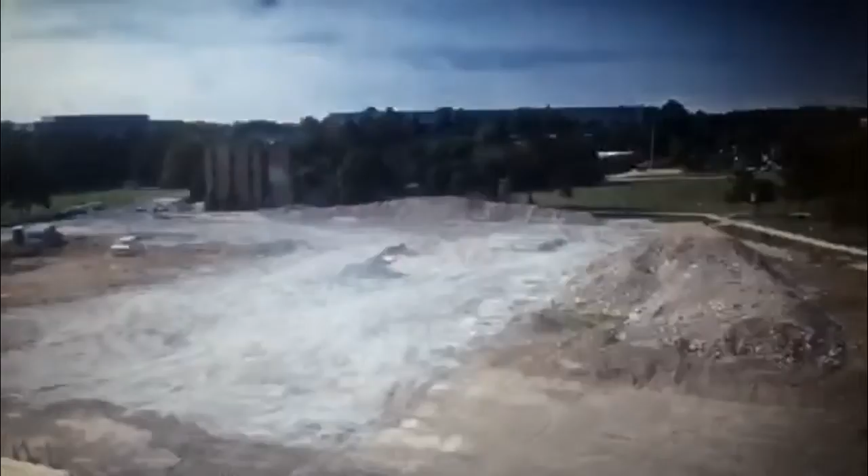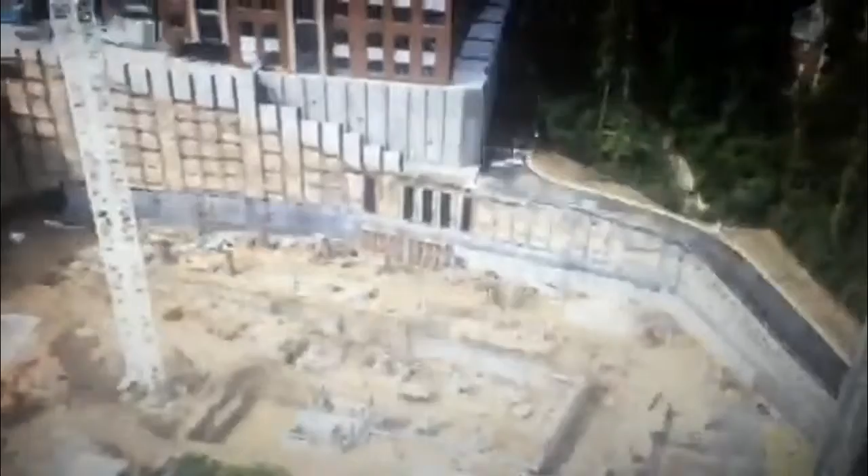Hello, this is Dr. David Joyner. We're getting ready to give you a presentation, an example of dynamic engineering. We use a product called SiteOps in order to do this dynamic engineering. It is a very powerful and quick way to produce conceptual plans that used to take two to three weeks to do, and we can now do in just two or three days. It is amazing, and I think you'll agree with me as we go through it.

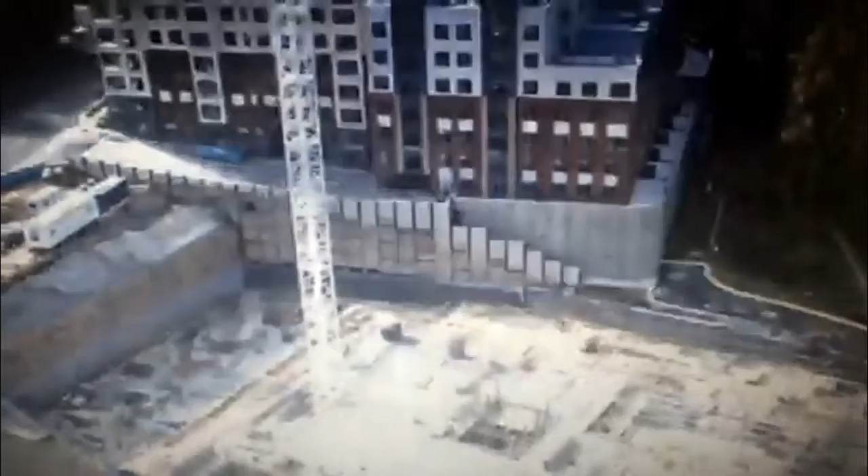I want to remind everyone who's getting ready to watch, this gentleman doing the presentation is a first-rate expert, and he will fly through in nine minutes what everybody else would take twice as long to talk about. He is just that good with it.

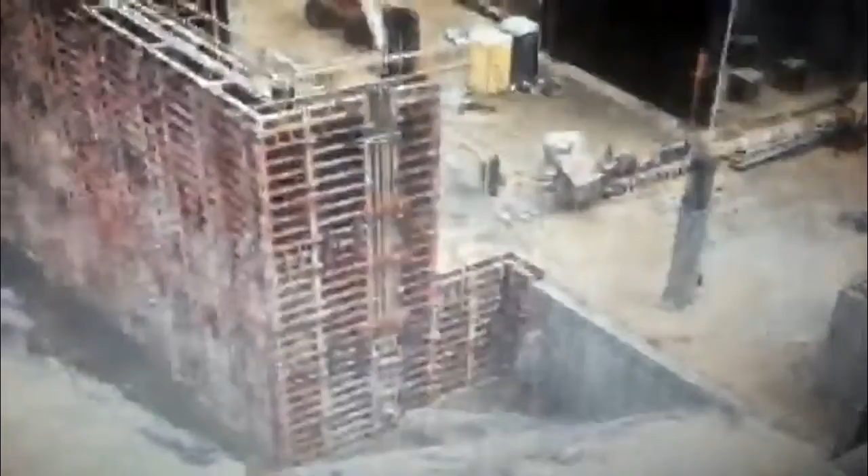Dynamic engineering is going to very quickly allow us to look at all the what-ifs on your job site and decide the best place for the building, the best size of the building, how to put the parking in, where to put the inlets for water, how to do the grading. I mean, it will not do preliminary engineering, but it will almost get us there. It is that good. I'm very impressed with it. I think you will be too.

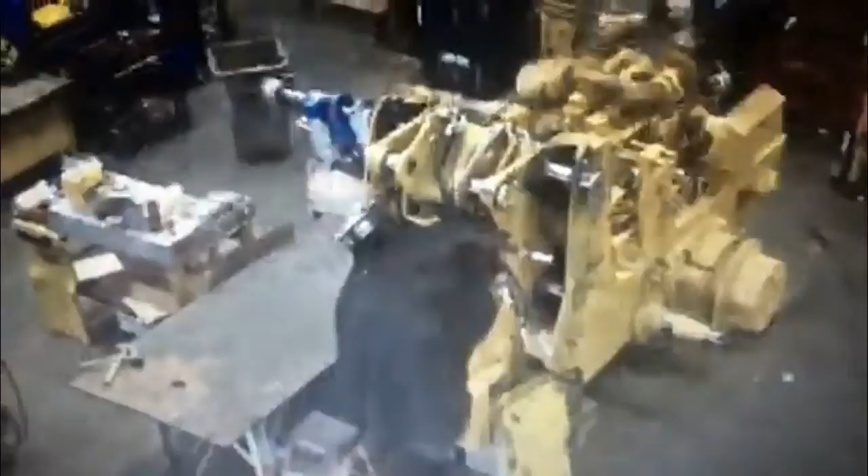In addition to dynamic engineering, the one thing that Trinity Group can do that other engineers and architects cannot do is go that next step beyond what SiteOps can do, and take that SiteOps information and pull it into a financial pro forma. Now, without any further ado, let's begin.

You can start with something as simple as nothing and just start drawing boundaries and buildings, or you can come in and maybe use one of our tools that allow you to go out to the internet and grab some data. So we're going to quickly add in an address, but by all means, if you had a DWG file, say an AutoSurvey, you could bring that data in as well and start from that point, or just enter in a project and have the software just do grading and piping.

So we're going to enter in an address in Concord, North Carolina. We'll zoom into this project and we'll be able to see it, be able to grab the data. We won't use low resolution imagery - we want topography, and we'll select the data that we want to use. Now, there we go. We now have an aerial image and some existing topography to start working with our project.

So let's turn off the layer and get in and start actually performing a layout. We need to define the boundary, so we'll quickly use a tool called 'other area' to define this boundary, and there we go. We've now set this boundary for the project.

Now let's come in. Parametric design is the basis of SiteOps. Everything in here has properties. For example, I'm on a property line, and I just went and changed the setbacks to 0.

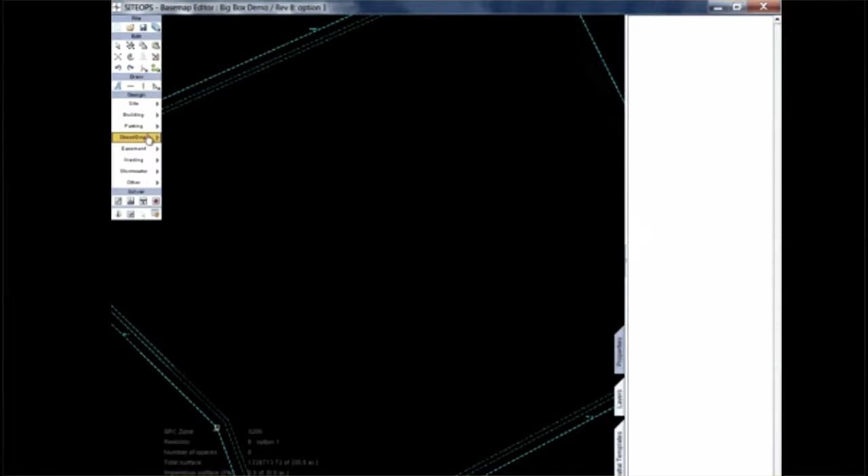Let's zoom the image down a little bit, and I'll show you examples of what parametric design is and how these objects interact with each other. So let's quickly draw a parking lot. Within seconds we can draw hundreds of parking spaces that normally would take hours to do. There we go, there's a parking lot.

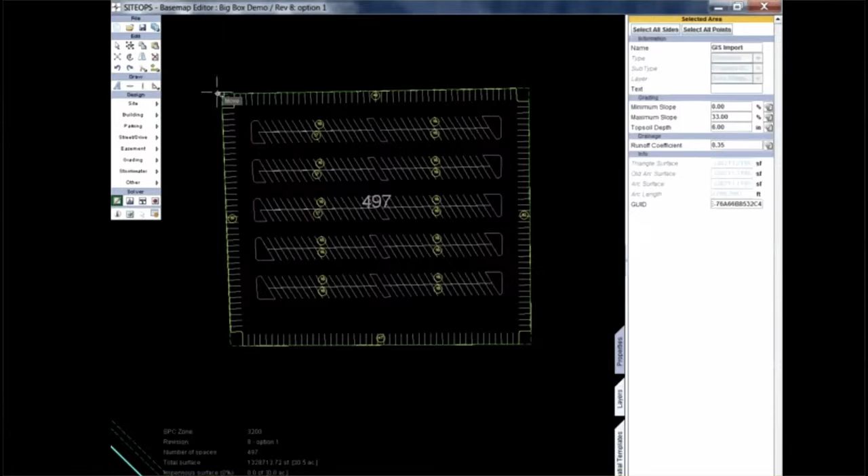Now I can look at the properties on the right-hand side. Let's say I wanted to change the angle of the parking spaces to 60 degrees. This is not a static parking lot design - it's very dynamic. Pick on any corner, move things around, change radiuses. Very interactive site plan.

So let's come in and put a simple building, maybe 100 by 200, and see how that reacts. Instantly the parking moves away. And if you notice on the right-hand side, the properties for the building are completely different than they are for the parking lot.

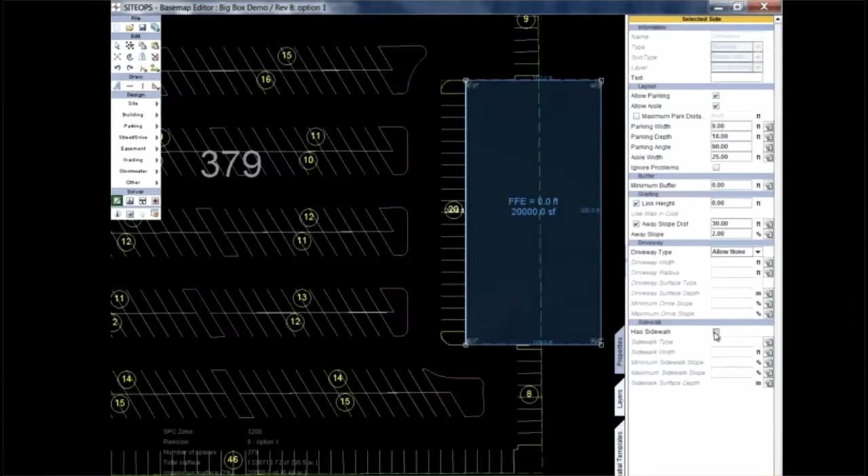Let's say we want a sidewalk. Let's make it a little wider so we can put in some tables for a restaurant. Then the client asks for something simple - let's rotate it and move it along the southern property line.

SiteOps is here to help you look at all your conceptual designs really easily and quickly, but still give the client everything they need. Now this is just a quick glance into parametric design.

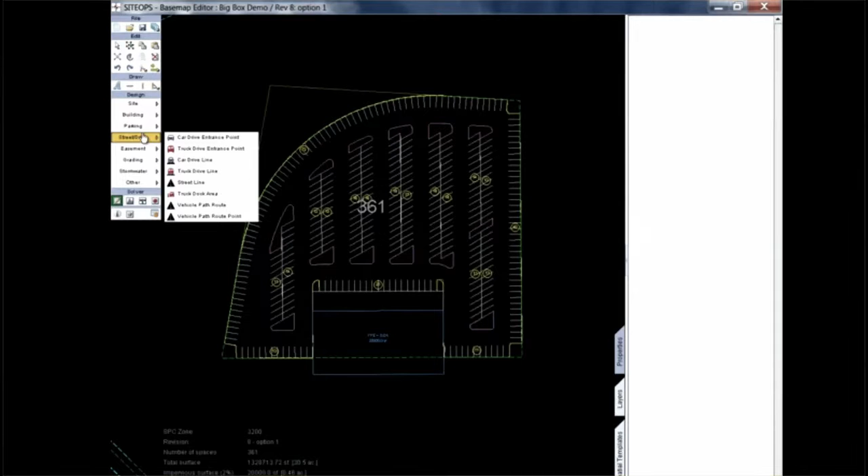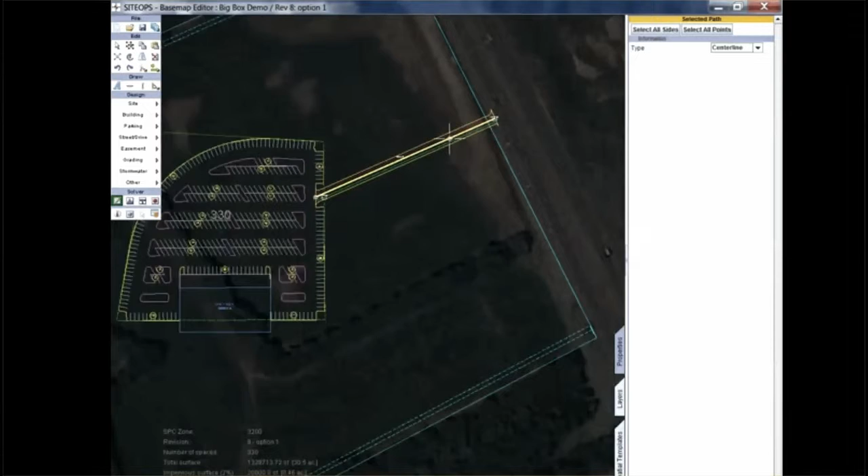So let's add a quick driveway. Simple - just pick on the parking lot where I want to tie in, go out to the existing roadway. There, we're done. So again, parametric design is the ability to allow objects to look and react with each other.

So let's come in and do this site for real. Now, spatial templates is another way a lot of our users like to use SiteOps. I could come in and set spatial templates up that can be very simple or very complex. This one has building, sidewalk, and parking areas.

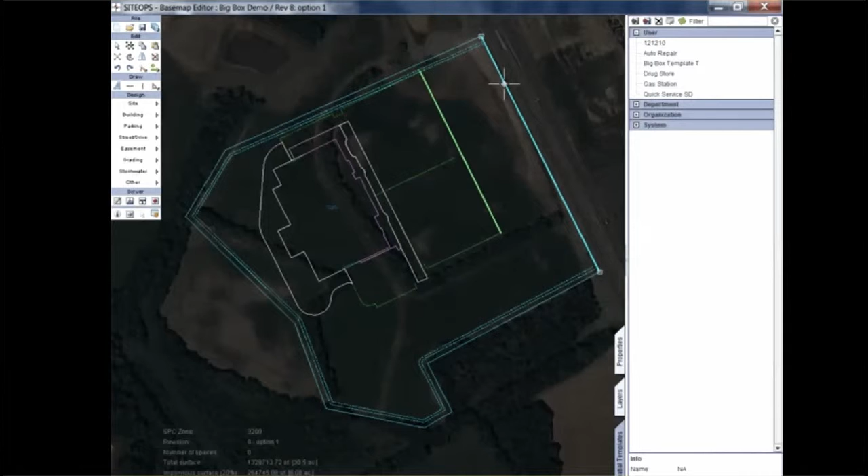You'll see I'm going to use some of our basic CAD tools, for example offset. We can have offset, alignment, snaps, different things to help control the site. We'll offset that 270 feet so it lines up. Start that drawing solver, and there we go. Now I can simply see the layout.

But with the spatial templates, it's just a starting point - you don't have to keep things a certain way. Let's do something a little extreme here. Take this parking direction line, which controls how the parking looks, and see how I simply just picked on a point, moved it, and changed it.

Let's add some parking features - let's add a parking bay point. Just simply click on it, change the property, and there we go.

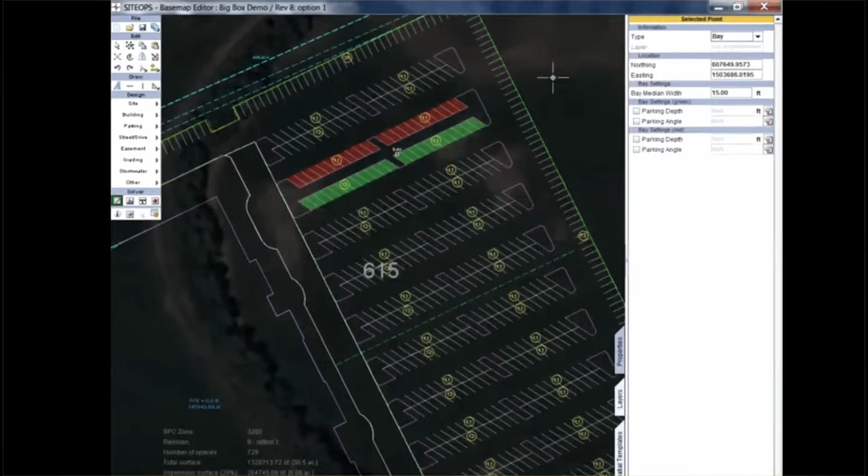Now we've got landscaping, bioswale, any kind of thing we'd want to add in there. Let's add something as simple as handicap. Come in, pick handicap, define the area where we want it, tell it how many we want to see. There we go. And then I can even change the material for that, and come in and change the slopes to reflect ADA codes that need to be met for that certain area.

So again, a lot of things inside SiteOps to help you get very detailed with your layout.

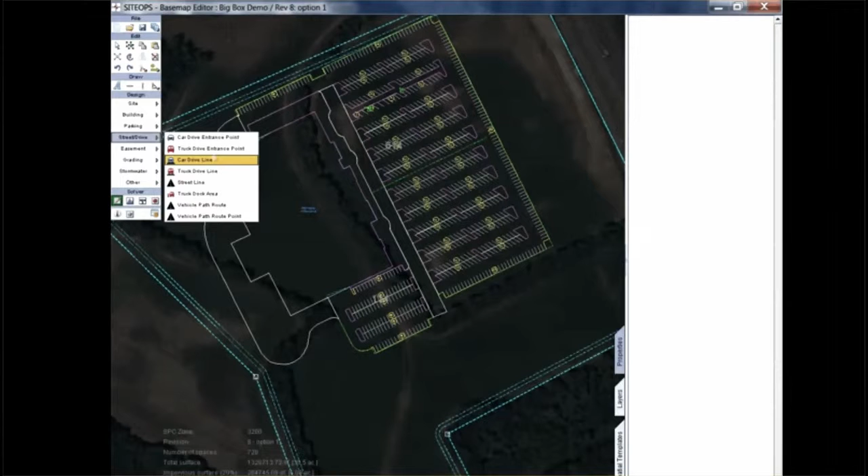So let's come in and just add a simple driveway to this one. Driveways can be very simple, just from one point to another. They can connect parking lots, connect existing roadways to proposed roadways, and we can get very detailed. Here I'm making multiple lanes in and out with tapers.

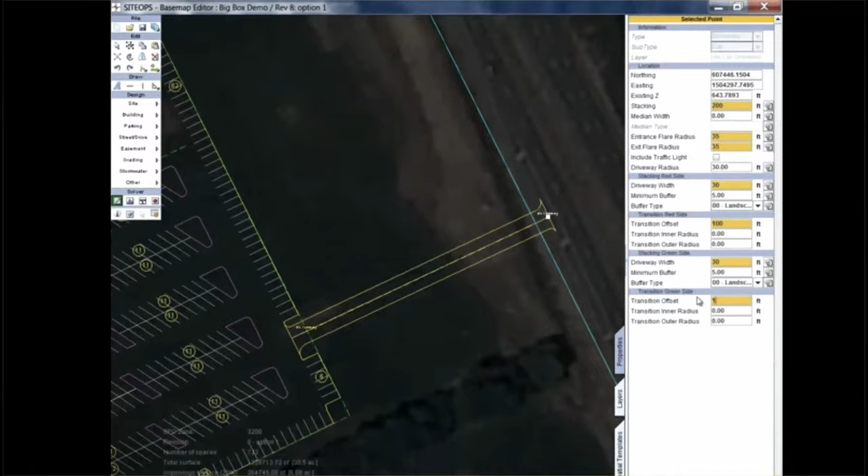You see on the right-hand side we've got the properties. Hit enter, and there it is - instantly we see that. We could add medians.

Again, a lot of things we can use. Now I've gone further along inside this design. I've added a few other spatial templates, but I want to show you one more. We'll add in a gas station.

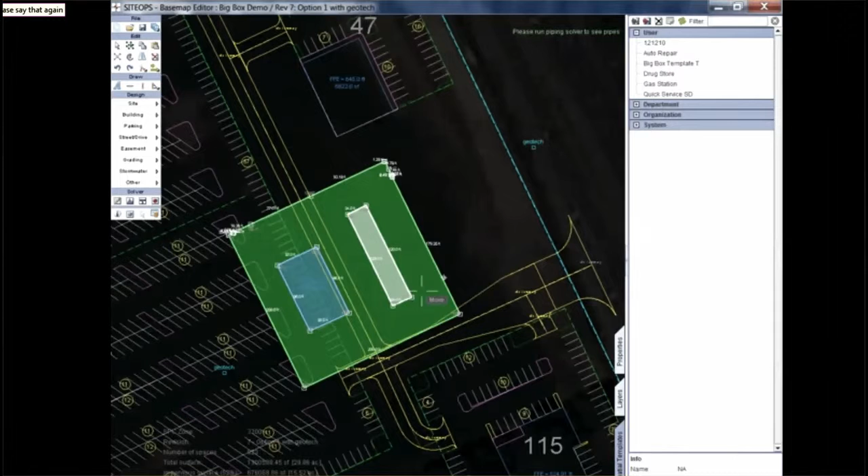Just remember, use the spatial templates. They're going to make life nice and simple for you. Bring this gas station up. All I got to do now is come in, do a quick offset. Maybe I want to align this up to a property line. Drop a few driveways, hit the solver button, and I'm done.

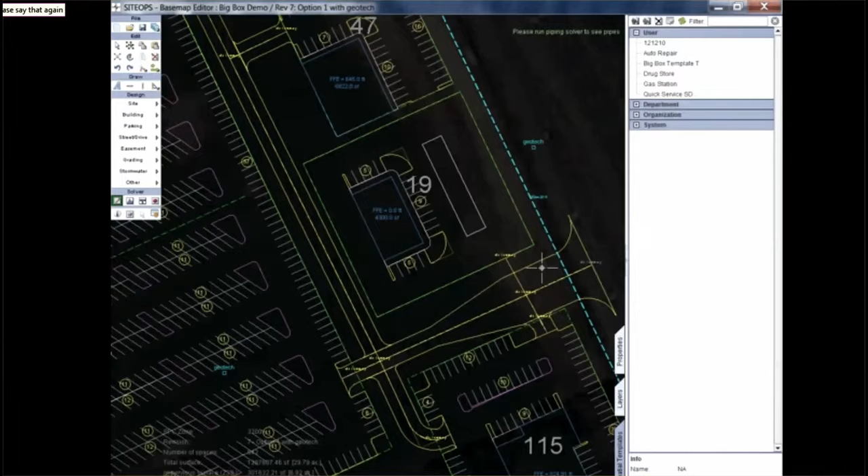By use of templates, you can make your life even simpler and even faster than SiteOps already does if you don't use them. So there we go. That quick, I've created a gas station.

Now we have all other kinds of tools and areas that need to be addressed. Let's say, for example, what if we had an out parcel? Don't know what we're going to do over here, but definitely want to grade this, especially at the time we're doing the grading for the rest of the project. Identify areas, and we'll just quickly come in and create an out parcel from this area.

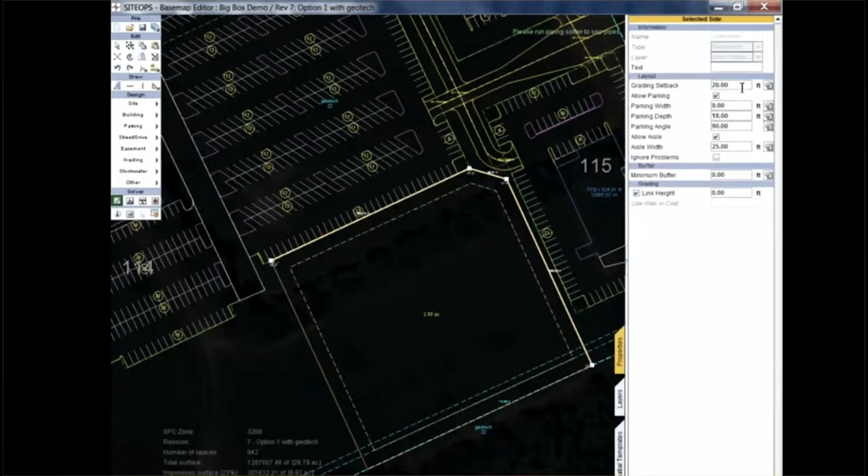So let's come in and add a detention pond. Now you can tie in stormwater into existing catch basins, existing ponds. You can come in and have the software do conceptual design, or you can come in and just outline and create your own stormwater pond. So there we go. But it does have properties you can change as well.

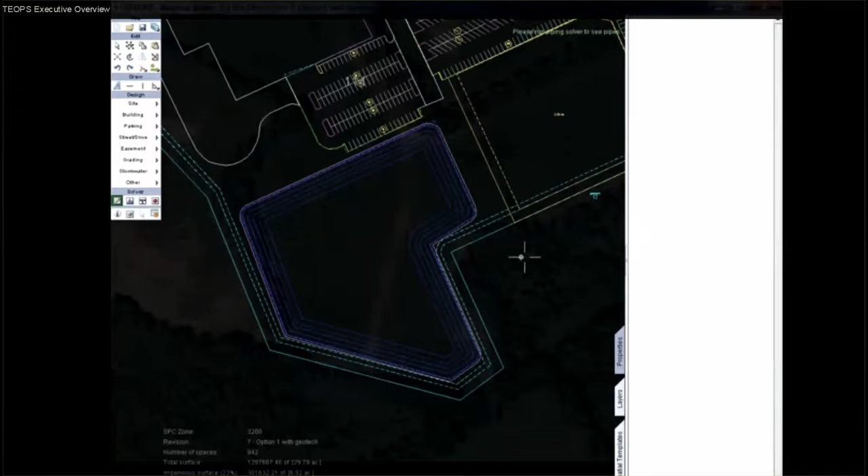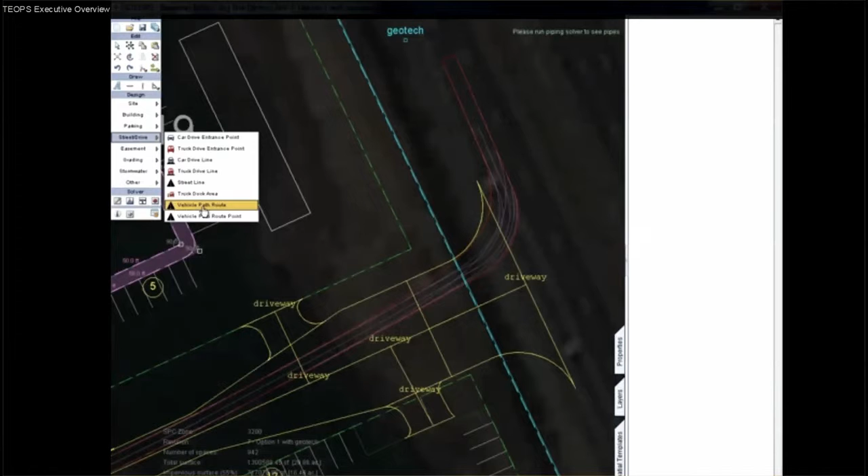Another great tool we've added inside of SiteOps is a swept path analysis. What this is, it gives the user the ability to define the path of the vehicle and then be able to see how that vehicle routes through that path. For example, we'll look at a transfer truck and how it comes into the entrance of a project, then set a point to be able to represent that vehicle.

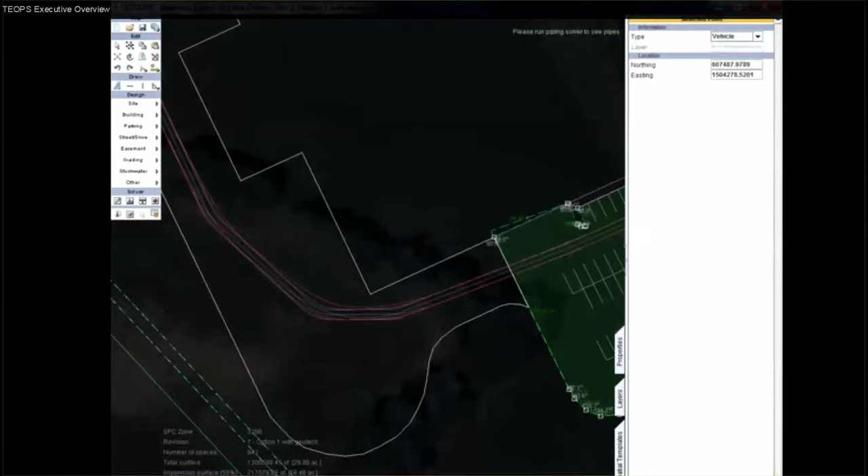We can also go back, for example, and see how it deals with the dock areas. The typical type of things that a client would want to see whenever you're helping to design a project. Again, we add this inside of SiteOps to help the project go forward.

Now let's grade the site. This is where we're going to see the cost. Look in the lower right hand corner, you'll see the numbers moving because it's doing a conceptual grading plan to make sure that we haven't made any assumptions wrong.

Red is cut, blue is fill, yellow means very little elevation change, and purple, that's retaining wall. SiteOps has the ability to look at import and export costs, grading costs, wall costs, and look at what is the best thing to do for this site.

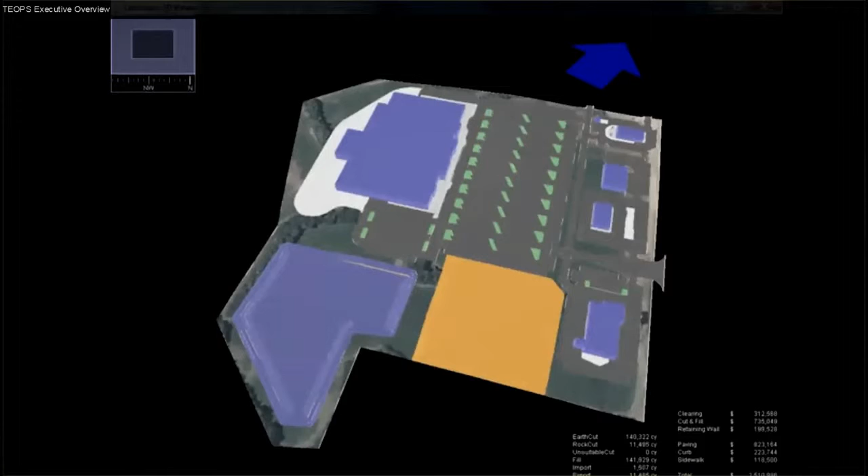We can see contours, we've turned them on, just getting an idea of how it's going to look sloping the parking lot, what direction, and get some concepts as we're going through with the project. We can see that images and buildings are three-dimensional. We can even see the dumpster areas on the fast food restaurant, for example. So again, a very nice little quick layout that you can visually see what's happening on this project.

Let's even take a look at geotech. If you do know the geotech for a site, once you get in, input it in, and see how the rock or unsuitable soil, contaminated soil, is going to affect the site, not just from a design standpoint, but from a cost standpoint.

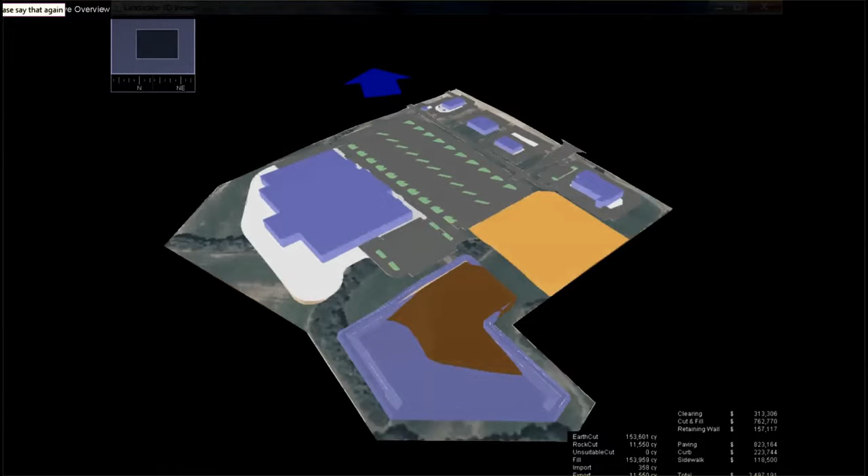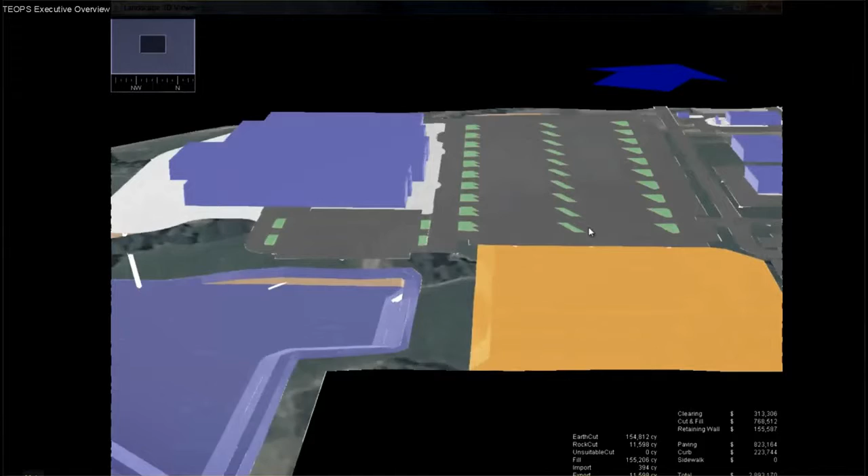Now, once we got the grading done, the next thing we need to do is piping. Piping is just a click of a button, and we've done some conceptual piping. Now, when we get through with optimization, it will look completely different. It will optimize the best way to move dirt versus the piping that we see here. And you will typically see piping come in with a lot less piping to meet the needs you need, and not more sheet flowing of water.

Once you've got a design, you would actually save it, and you want to go out and submit this for optimization. Optimization is where the software is going to look at thousands to millions of options on a site and say, what's the best way to grade and pipe the layout we've just created?

So you would actually tell it, I want to send this off. Again, this grading at this point, you just wait for an email. Is a fantastic feature. You want to go in and say, go back and look at your results and see what's happened. Now, here's this same site with and without rock.

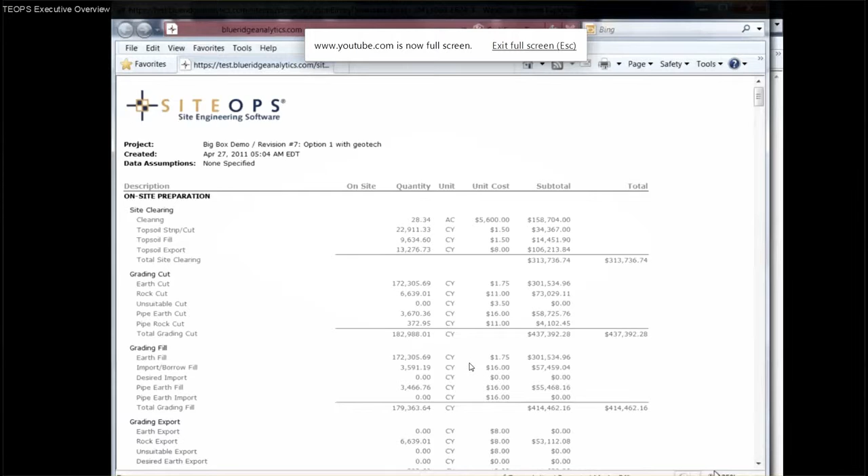So we can see there's a good bit of money cost due to adding in the rock, but it details a very detailed budget that you can see. You have your topsoil, your cut, fill, exporting, retaining walls, fine grading, your on-site improvements such as curb, gutter, asphalt. We have all that information in here with the unit quantity and unit cost.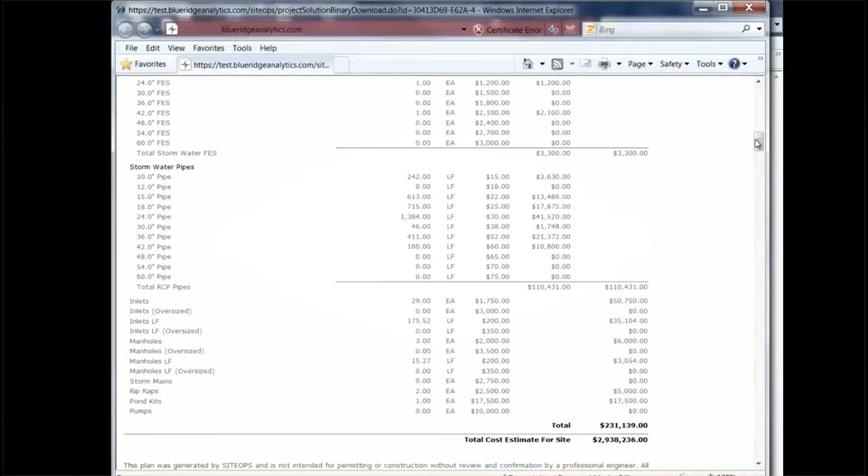And then we come into your stormwater. Then we see a nice cost, a little over $2.9 million.

Now we also bring this in for an output as an Excel, but you also have DWG and LandXML files that you would take the design that you want to go forward with to construction document phase. For example, pick the DWG, open it up inside of Civil 3D. We'll turn off a few layers.

Now we give you finished grade and finished subgrade contours, because we do grade the subgrade, because you can put those material thicknesses in there. We also give you 3-line curb sections. We give you all the information you need to pick this up and go forward in your design.

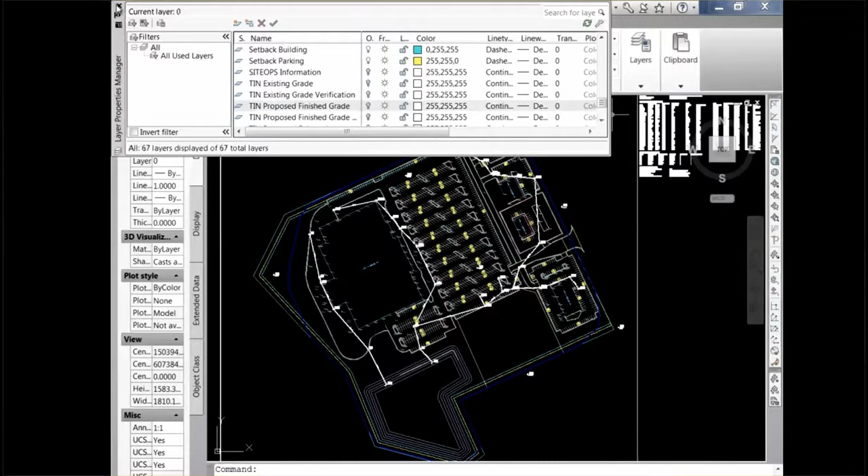But SiteOps thinks just like a civil engineer would. For example, a civil engineer, when he's doing a grading plan, is going to take an existing grade and he's going to do a comparison against the proposed grade. We normally get enough budget to run through 4 or 5 cycles, and we're out of time or money. With SiteOps, you can do millions of those same cycles in a fraction of the time it takes you to do just one. So let's zoom in.

Finished floor elevation, again, you can control it. You can let SiteOps figure out the best one. 3-line curb section, piping with your length and slope, spot elevations, parking counted.

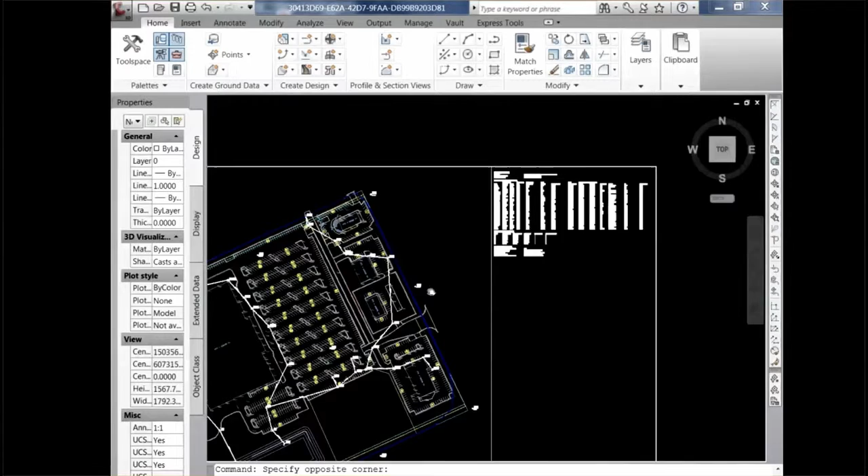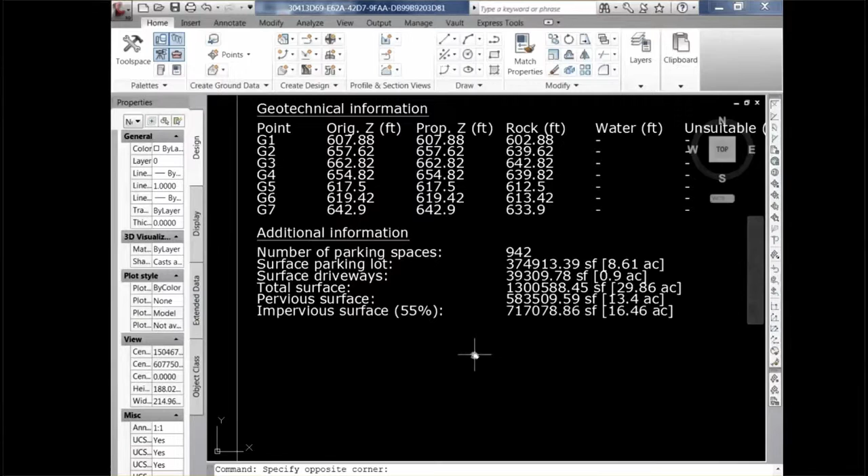And then over on the right-hand side, you can see that the piping looks a little better. And here's an actual storm drains design table with everything from rim elevations, invert, in and out. Additional information all the way down to the amount of impervious surface. A great time saver so that you don't have to figure that out.

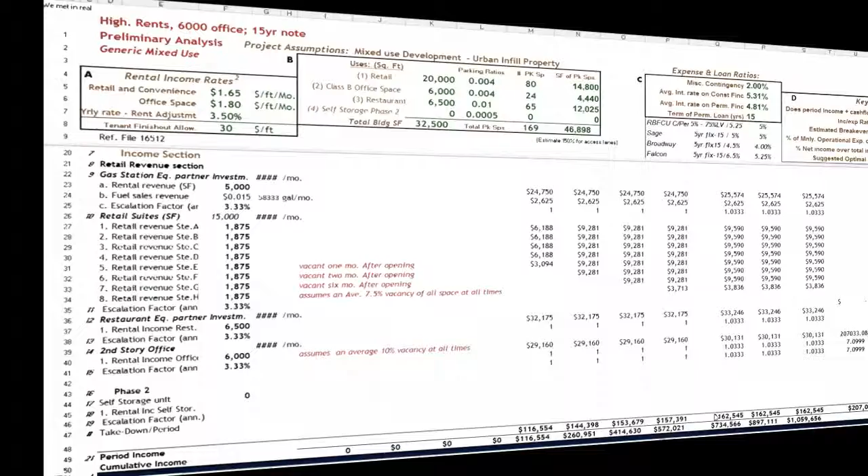So this is basically SiteOps in a nutshell. Now, let's take a quick look at a sample project we've done in the past. This is Dr. David Joyner. What you see in front of you now is a pro forma for a mixed-use development. It's a mixture of retail, office, and restaurant space.

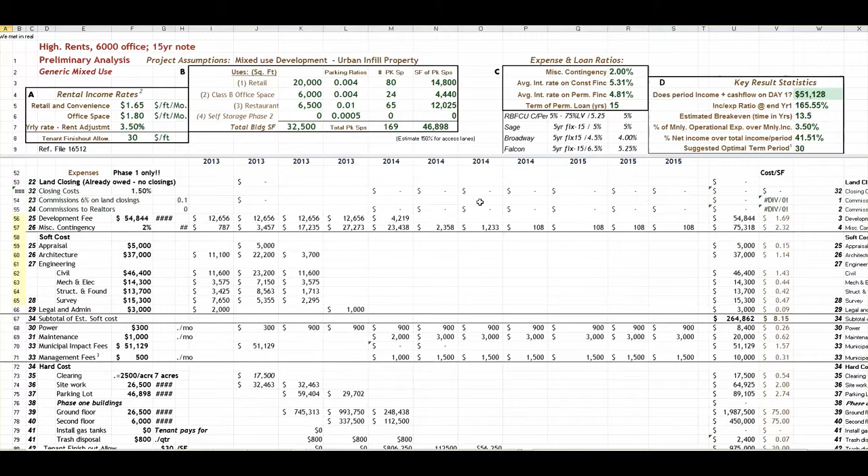Now, SiteOps can help us with the expense section. Very quickly, we can get the information we need to have accurate site and development cost for your development. In addition, the Trinity Group has the expertise to spread those costs into the right periodic periods that we expect to see them. Now, in addition to that, the Trinity Group keeps in contact with local brokers so we can provide up-to-date income and sales figures to use in our income sections.

And very quickly, we can make changes such as the one you see in front of you. Let's change this back to 5,000 square feet. Hit return. And automatically over here in the key results statistics, we can see changes in the cash flow on day one, as well as income expense ratio figures and other critical information that we need to make sure that we're making the best decision on what to use the property for.